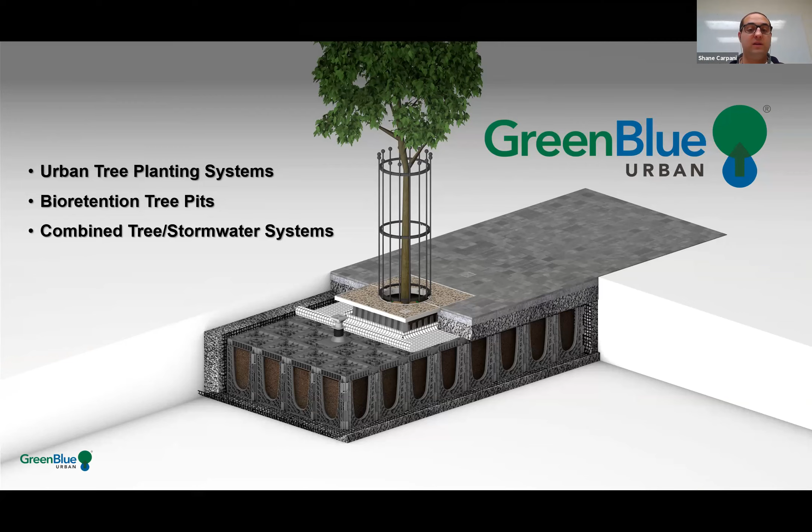Then once we realize that, we will move into the stormwater aspects of how we integrate stormwater management into those types of systems.

The benefits of urban trees are very often understood purely as an aesthetic or beautification benefit that trees provide any given area, whether it be a streetscape, a plaza area, or whatever the case may be. But there's a lot more than just beautification and aesthetics that trees provide. The second most important one, as we can see from this study done in Indiana, is stormwater management. 31% of the benefits provided by trees, these economic and environmental benefits, are being provided through what they can do for stormwater management and the sustainable management of stormwater.

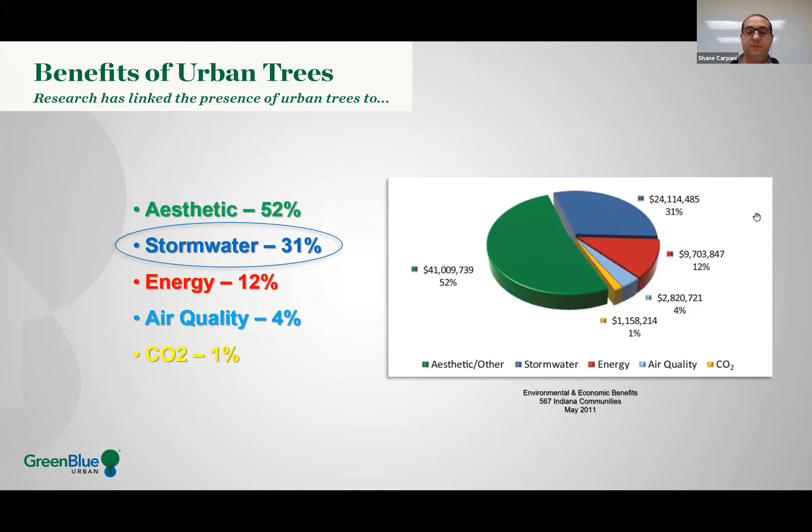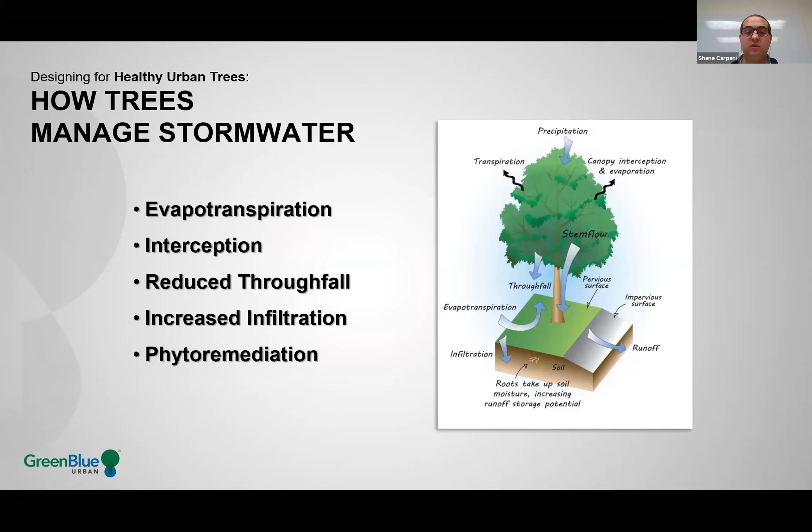We're going to talk about that today, everything from evapotranspiration to interception, the canopy interception of how the tree collects the stormwater, what it does with the stormwater, increased infiltration, phytoremediation, and different elements in which trees actually accomplish that kind of benefit.

First, we'll start with this statistic to help put it into perspective: for every 5% of canopy cover in an urban area, stormwater runoff is reduced by 2%. So every increase in 5% of canopy cover is a reduction of 2% in stormwater runoff. This is just factoring in the rainfall actually landing on the canopy or leaves of a tree - this isn't even taking into account runoff that we're actively channeling into a bioretention tree pit, which we will discuss momentarily.

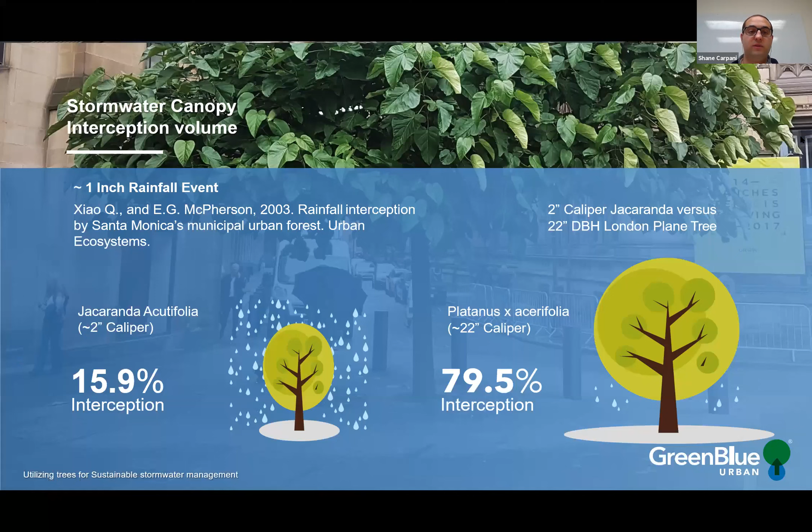With that canopy interception, of course, the larger and more mature the tree, the more stormwater it's going to be able to intercept, and the more stormwater it's going to be able to reduce through uptake via its root system as it takes that stormwater up through transpiration. We'll talk all about this in more detail.

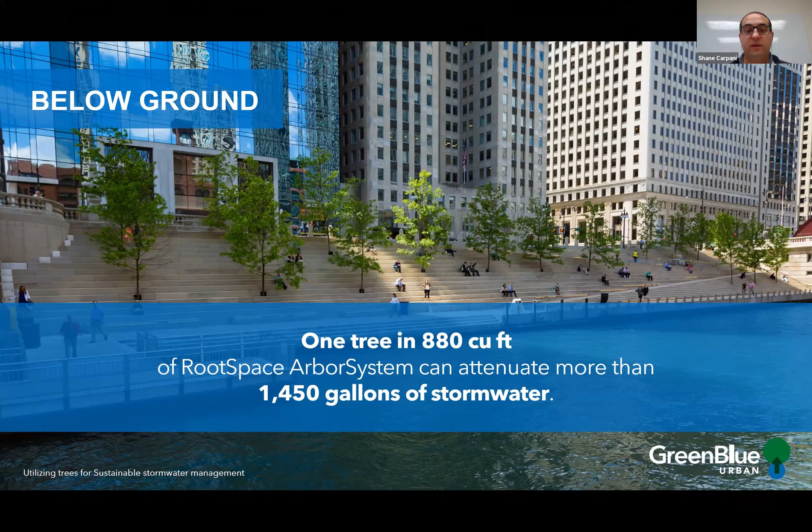Looking at some further numbers here, 880 cubic feet of an engineered bioretention tree pit system can attenuate over 1,400 gallons of stormwater. This puts into perspective how much stormwater these engineered tree pit systems can actually manage. We've worked on projects where, through the use of these kinds of systems and designs, we are managing 100-year storm events with no runoff from the site. So huge amounts can be accomplished through the use of this.

Now, why do trees fail? We talked about needing healthy trees to take advantage of those benefits. Well, why is it that most trees in urban areas are not healthy? There's a few factors that come into play in relation to that.

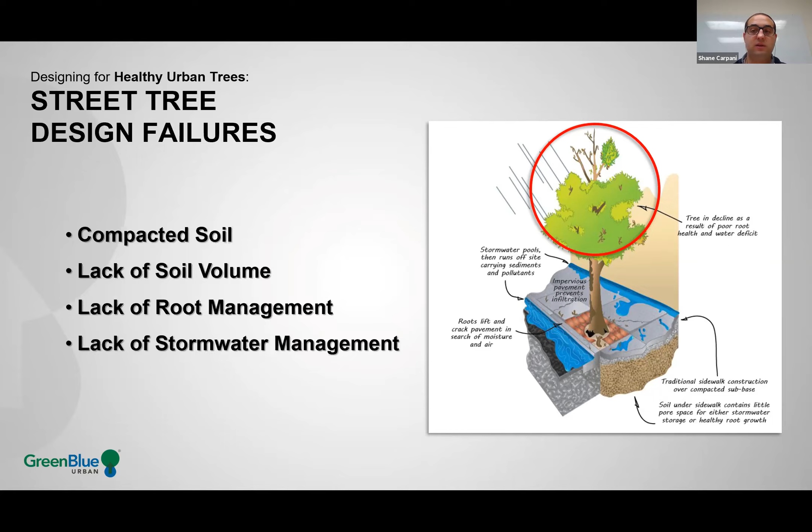The first of which is compacted soil. Not having an adequate volume of uncompacted soil is probably the number one cause of premature mortality in urban trees. So there's no rooting volume for the trees - there's not enough space for the tree roots to establish below ground without damaging surrounding infrastructure. And we're not managing the tree roots into intended rooting areas so that they're not damaging utilities, paved surfaces, building foundations, or other built infrastructure that might be around.

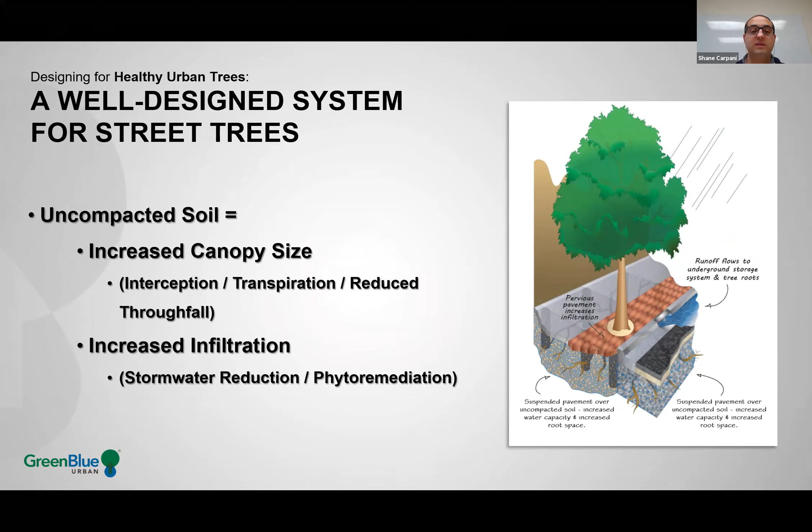So we increase the amount of uncompacted soil, and we're increasing both the rooting volume for the tree and therefore the mature rate and canopy diameter and size of that tree, as well as the infiltration and the attenuation area that we have to hold stormwater. So the more roots and the more canopy, the more stormwater these trees will be able to manage.

So imagine how to accomplish that in an urban area. Think of these trees lining a streetscape or dotting a pedestrian plaza area. How do we provide for this kind of rooting environment underneath that hardscaped area? That's a lot easier said than done in an urban environment where we've got utilities and building infrastructure competing for that space. So that's really where the root space arbor system comes into play, an engineered system that allows for the marrying of the tree with the built environment.

So bringing the best of both worlds and allowing that tree to coexist in an urban environment, thrive, and reach maturity, while ensuring that there's not going to be any built infrastructure damage as a result of the tree maturing. So how can we better utilize trees for stormwater management?

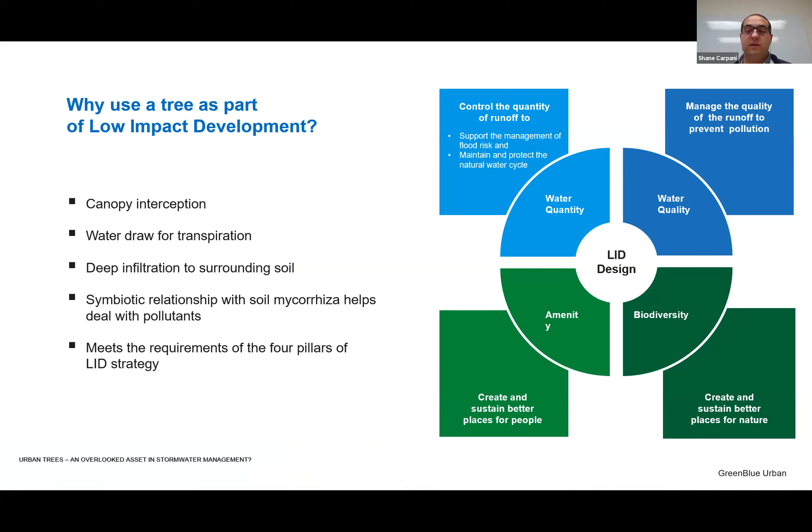First, we're going to talk about planning, and then the different design considerations we have to consider when designing trees. We're going to talk about the way trees manage stormwater in terms of quantity, so reduction of stormwater quantity, and then improvement of the quality of the stormwater that there is. And then, of course, there's other amenity and biodiversity benefits that trees provide as well.

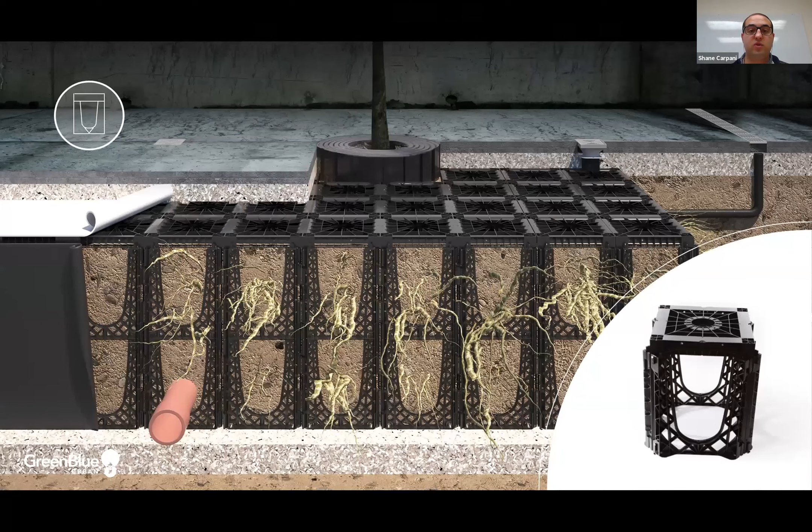So these are the components we're going to take a look at. These are the considerations we need to make when designing trees into an urban landscape. If we tick off all of these elements, we are assured to have a tree that reaches maturity in an urban environment. Number one, as I mentioned already, is uncompacted soil.

If we don't have enough uncompacted soil volume for the trees, they're simply not going to reach maturity. The most cost-effective way of achieving uncompacted soil underneath a hardscaped surface is through the use of a pavement support system or soil cell, like we're seeing on the screen here, the root space system.

This is a structurally engineered system manufactured from 100% recycled plastic. It's H20 rated, so it can be under fire lanes and roadways, not just pedestrian areas. This system assembles to provide 97% uncompacted soil, or 97% void space. So we fill this system with healthy uncompacted soil. The system itself holds up the surface, and then it's full of healthy uncompacted soil that can be used for tree root growth and/or stormwater attenuation.

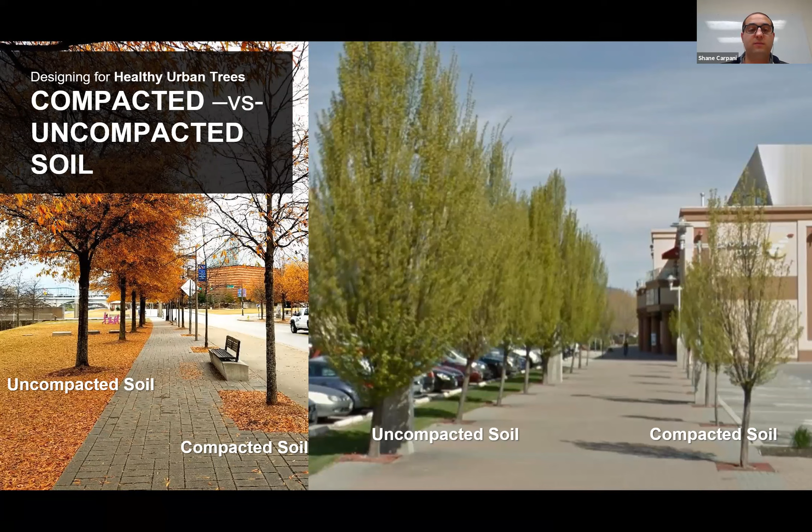Here we can take a look at some in situ case studies of uncompacted soil volume versus compacted soil. The trees on the left in both of these photos are planted in uncompacted soil versus the compacted soil of the trees on the right. We can see how much better the trees in uncompacted soil are faring.

The amount of soil any given tree requires in order to reach maturity depends on a couple of things, primarily the species of the tree and the canopy diameter of that tree at maturity. It can range anywhere from 300 cubic feet to over 1,000 cubic feet per tree in order for that tree to reach what we would call its species potential.

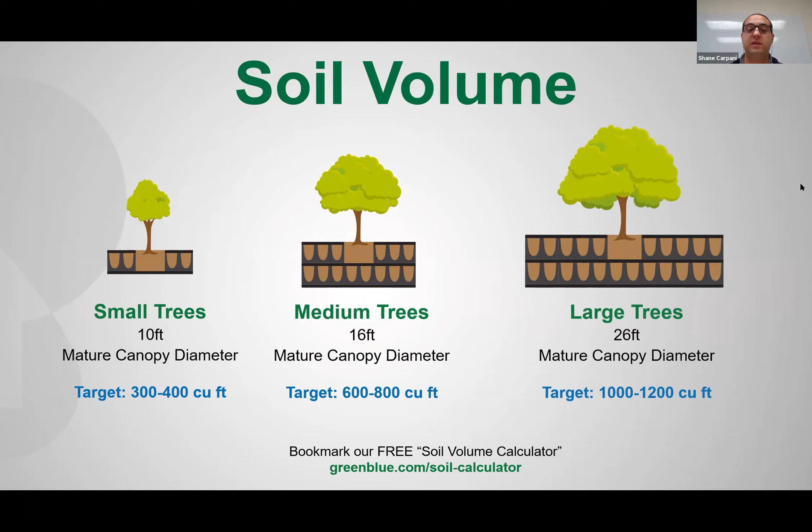Bearing in mind these numbers are for individual tree pits, the most cost-effective way to achieve high volumes of soil for trees is when we link tree pits together, or connect them in a linear connected fashion. We'll talk about that a little bit further on.

The thing to understand is that not all soil volumes are created equal. There are several different urban soil planting or urban tree planting options out there. Before the advent of soil cells, the most popular one was structural soil. We can see here, GreenBlue Urban invented the world's first soil cell in the late 1990s. You can see a controlled monitored study here at Bartlett Tree Labs in Charlotte, showing the use of all of these different systems.

And you can see after just 1 year, the growth rate provided by the soil cells and how much higher those growth rates are in the trees in soil cells. And of course, that's because structural soil is a combination of 80% gravel and 20% soil.

80% gravel and 20% soil. The 80% compacted gravel is what provides your structural stability to hold up the surface. And then it's got 20% soil mixed throughout that gravel that provides growing medium.

Whereas the soil cells, like I talked about before, we're using only 3% of that excavated area to hold up the surface with that root space system, and 97% of that area is usable soil. Here, this is after the study concluded at 3 years. You can actually see they air spaded out the soil to expose the tree roots, and you can see how much more root colonization there was from the tree in the soil cells, as you can see here.

So as I mentioned here, structural soil is 80% gravel. So these large gravel here, you can see representing that. And then the 20% soil that's mixed throughout the voids of that gravel.

This is showing the comparison. So the blue outline that you're seeing here and the red outline is the exact same soil volume. The blue outline is the structural soil layout, providing 120 cubic feet of soil. And that red area here is the soil cells, providing that same amount of soil, but with less excavation, less labor, smaller area, and providing that same soil volume.

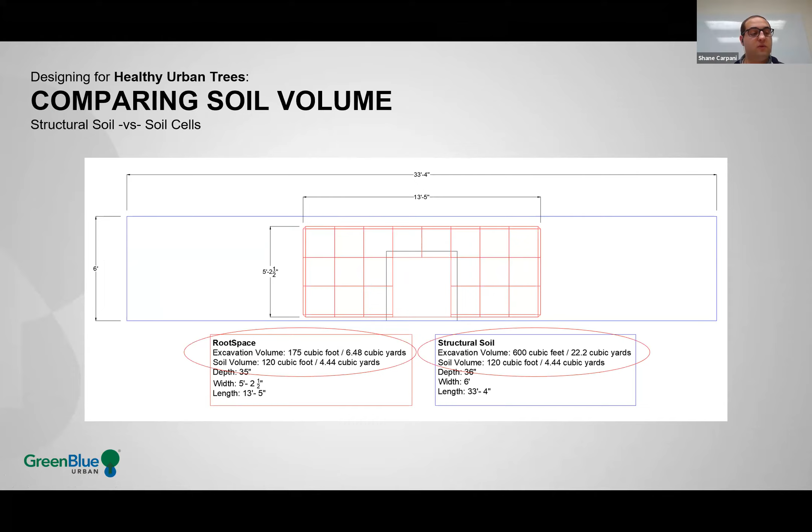So as mentioned, the system is manufactured from 100% recycled plastic. You can see the system in use here underneath the vehicular parking area.

Here we can see a bird's eye view of the installation of the system. Very modular and versatile system, able to be configured in any kind of shape and size. We can see this is actually a pedestrian plaza area that's separating a parking lot from a shopping mall area.

You can see the openings here where the tree root balls are going to go. So they're assembling this system out, leaving openings where the trees are going to go. This whole thing will be filled with soil. A surface will be put on and the trees will be planted in the opening.

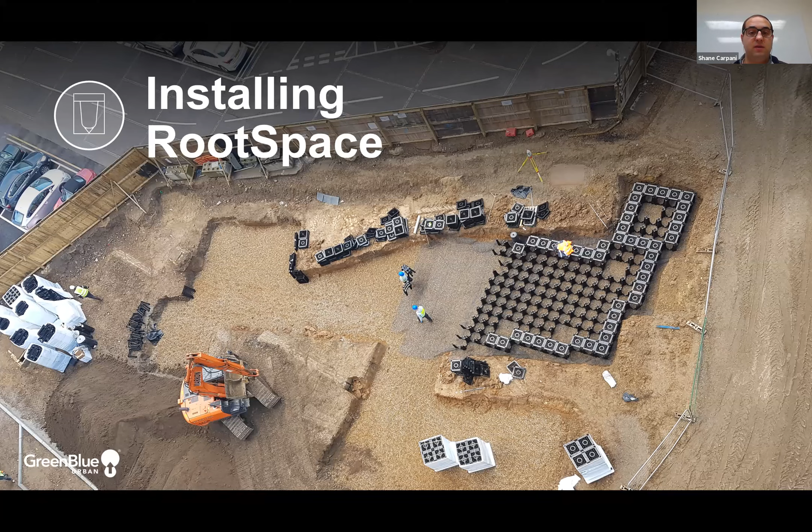This particular one has a permeable paver surface above it, allowing for percolation through that permeable paver surface into the system to allow for attenuation within the soil volume and tree uptake through the root system as the tree takes that stormwater up through transpiration.

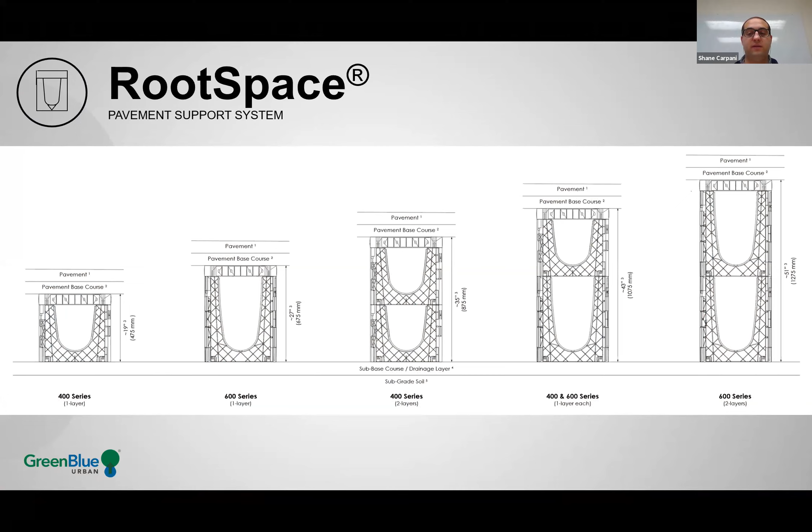Here we can see some of the common depth profiles ranging from 19 inches to just over 4 feet in depth, depending on different situations and scenarios. It's very easy to work utilities into the system, whether they be new utilities or existing utilities.

Here we can see the system being filled with soil, very easy to fill with soil. And one of the important things to understand again with this system is that this is being filled with healthy, uncompacted soil. There are no structural blends or proprietary elements. Any good planting soil can be used inside this system.

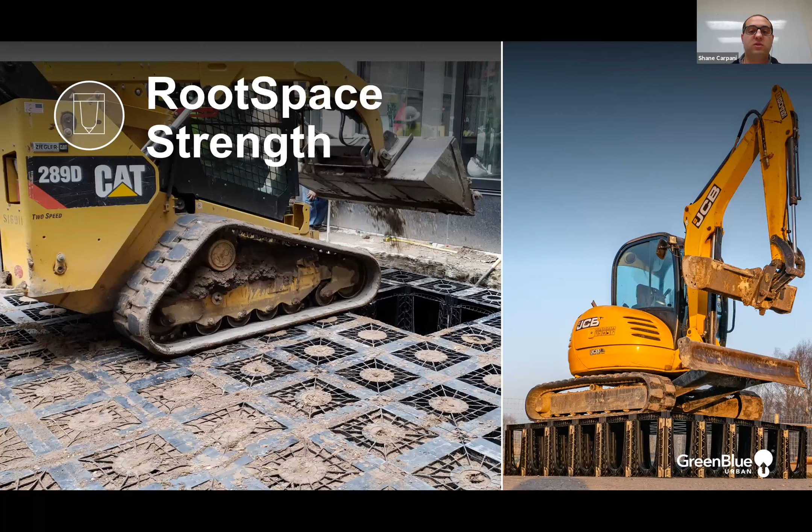And as I mentioned already, it is H20 rated. So the system goes under roadways, maximum vehicular areas with minimal surface above it. And you can see here even the ease and ability of construction equipment to drive right over top of the system without even a surface above it.

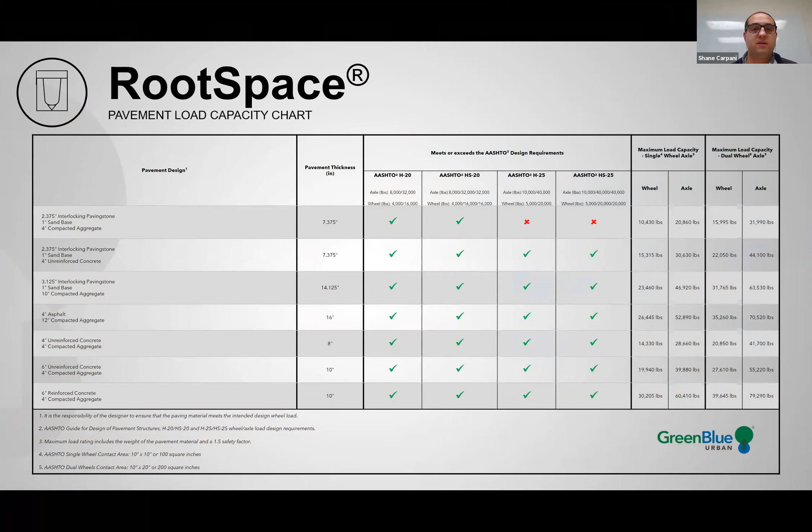So here we can see that with as little as 8 inches of surface, the system is H20 rated for maximum vehicular traffic.

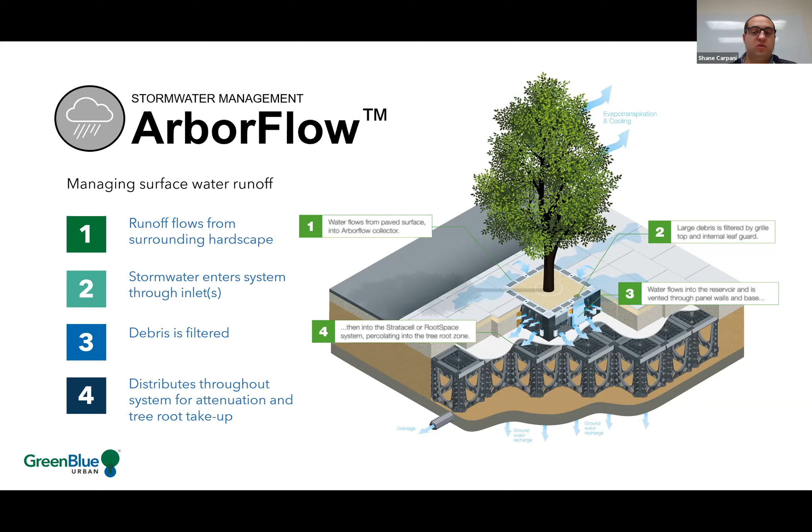So we'll take a look at stormwater now that we've talked about some of the elements that we need to be thinking about in order to have that healthy tree. We'll take a look at the stormwater side of things here because we want to take that stormwater, channel it into this engineered tree pit system to use that soil to attenuate the stormwater and allow the tree to take up that stormwater. So this short animation here is going to show the basic function of the system.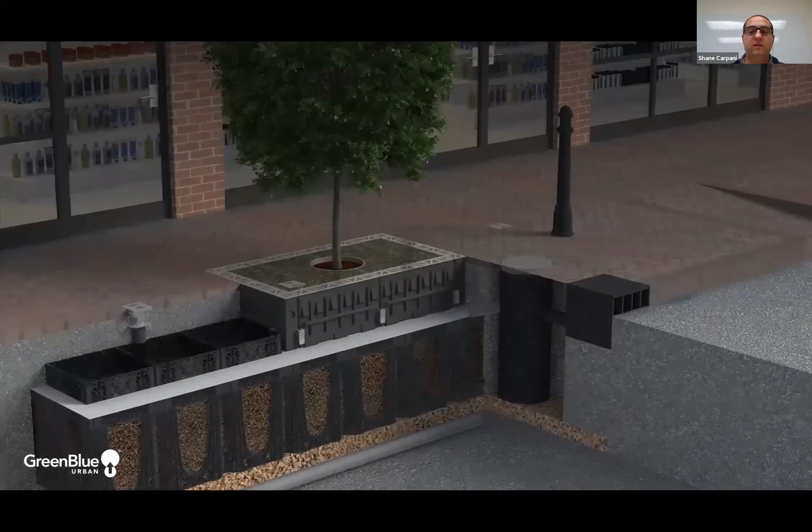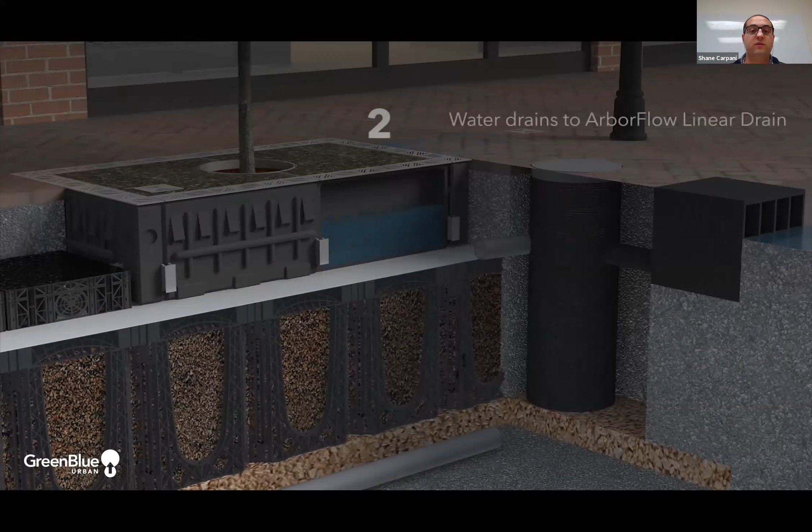In a rainfall event here, we'll see the different ways in which we can bring stormwater into the system, whether it be through a curb inlet, into the system through a catch basin or sediment separator, and distributed throughout the system. It could be through a linear drain or a trench drain, as we're seeing around the tree there. That linear drain could also be along the back of a curb of some sort. It could be through the ArborVent inlet, as we're seeing there.

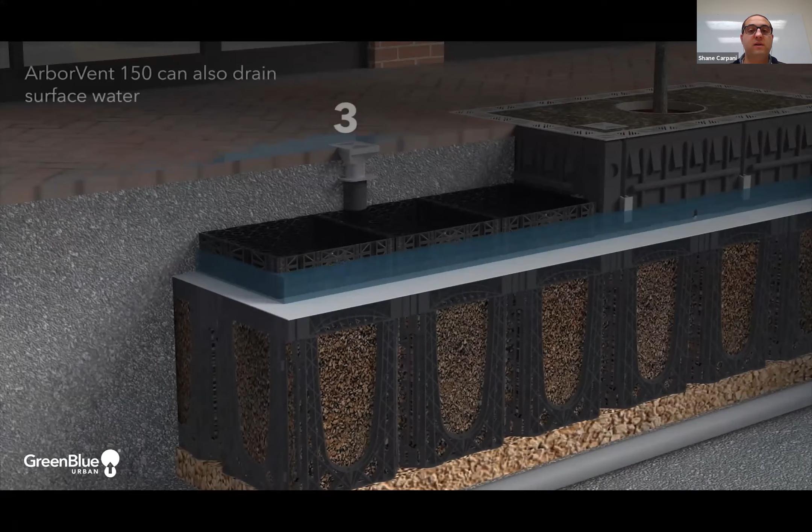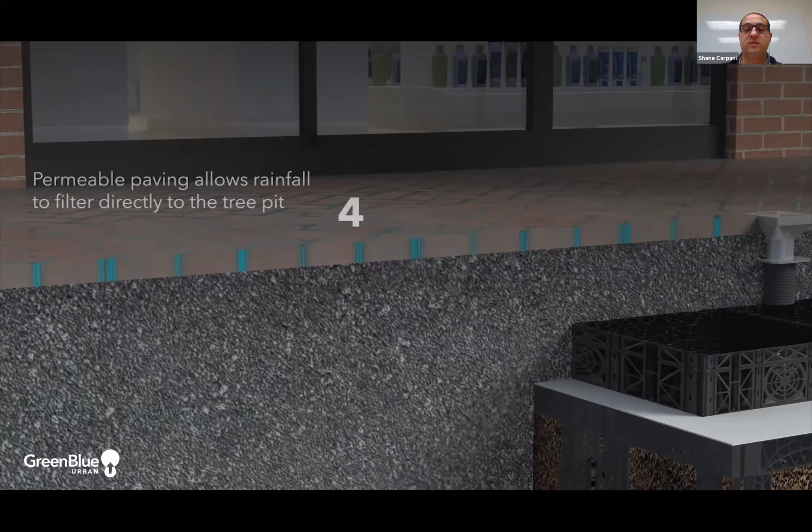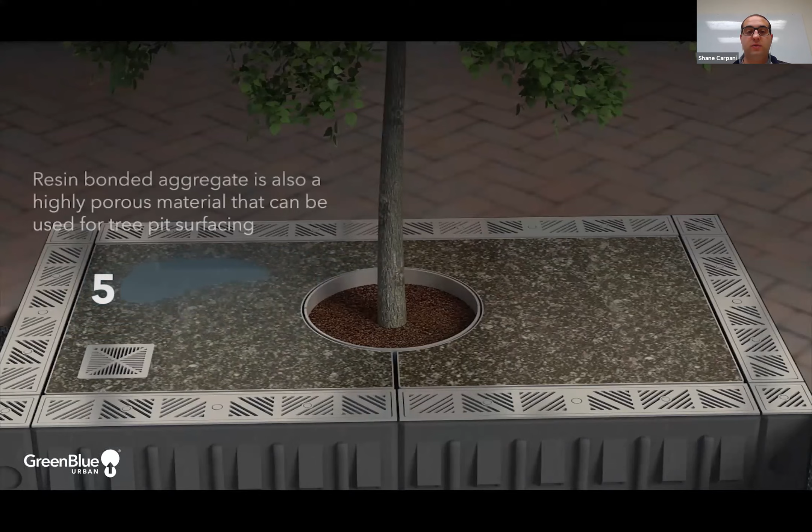Or it could be through a permeable paver surface, as we're seeing right here, allowing water to percolate down into the system, as in the previous installation example. Or it could be through another version of pervious surfacing like arbor, a resin bonded aggregate, or decomposed granite.

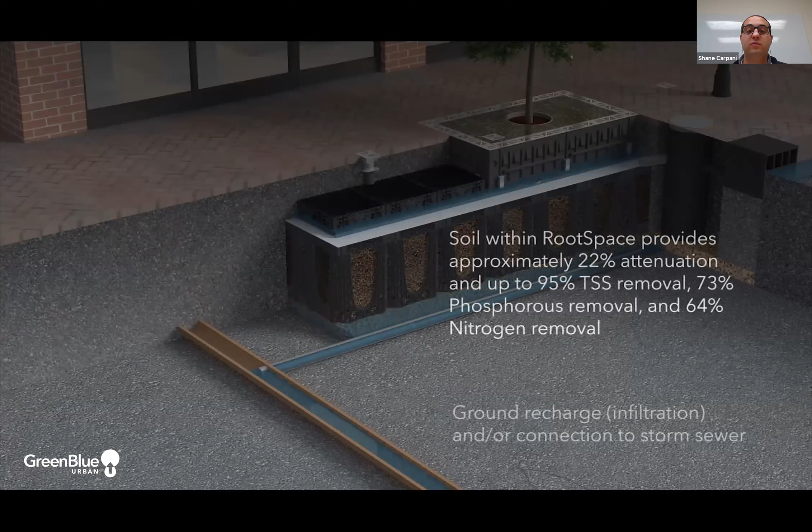Regardless of the way in which stormwater enters the system, it's evenly distributed throughout the soil profile for attenuation and root take-up, and any excess is drained out through a drainage layer below, tied into the storm system, and infiltrated into surrounding groundwater depending on site conditions. The discharged stormwater is significantly cleaner than when it entered, because the system uses the soil and the tree to filter out nitrogens, phosphorus, and other materials.

This chart shows that quality improvement of the system, looking at total suspended solid removal, total phosphorus removal, and total nitrogen removal. This is a comparison of the bioretention tree planting system to a rain garden, a more traditional green infrastructure application. The top dark green line is the target removal rate, the middle green line is the rate achieved with the rain garden, and the bottom light green line is the rate achieved with the bioretention tree pit.

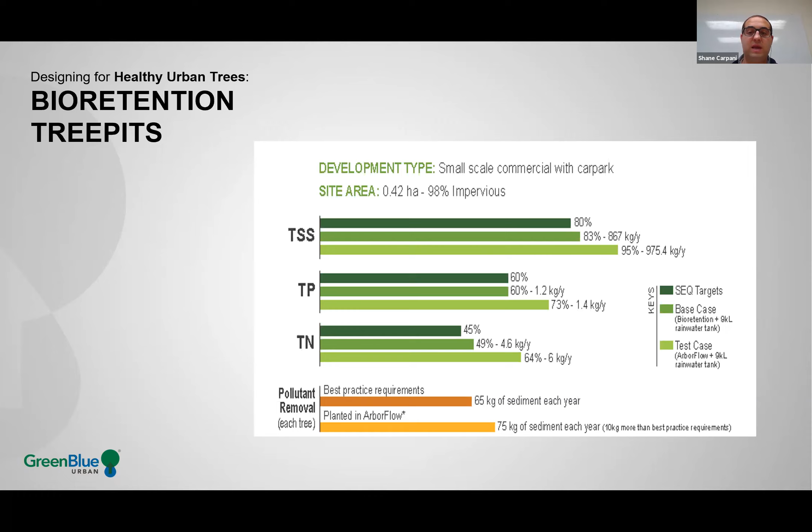You can see that in every instance, the bioretention tree pit actually outperformed the rain garden, all with the added benefit of reduced maintenance. Because a tree doesn't have the same level of maintenance involved as a rain garden or bioswale, we can bring the ongoing costs of the BMP to a much more manageable standpoint.

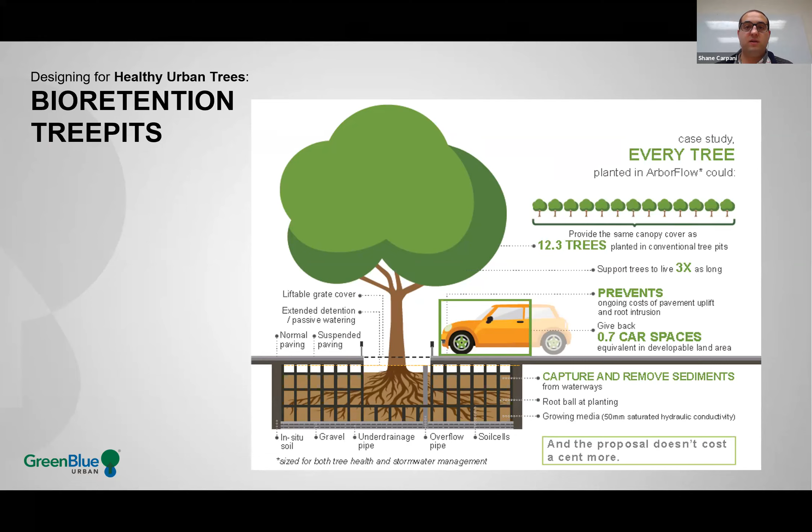In addition to reduced maintenance, we also have maximization of real estate. Because the system is all below a hardscape surface other than the tree pit or tree planting opening itself, we can maximize surface for parking, sidewalk, or whatever the case may be, versus the otherwise underutilized real estate of a rain garden or bioswale application.

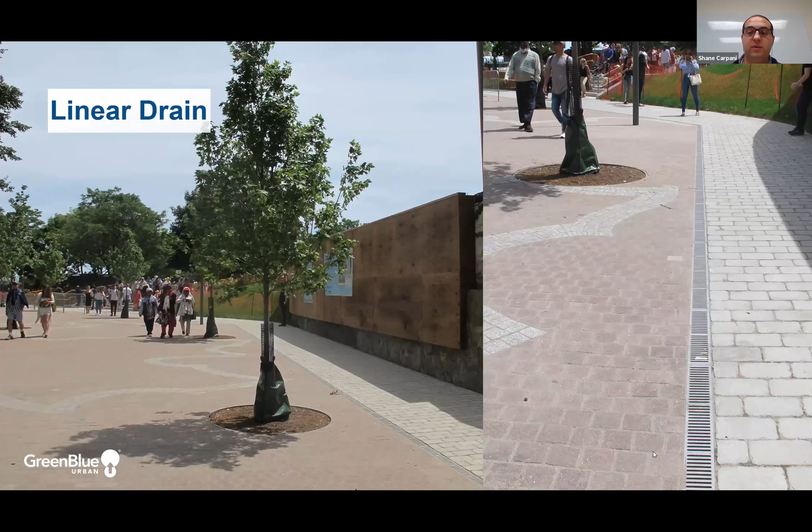Here we can see that linear drain a little closer up. This is a common application, whether on the back of a curb, along a parking lot area, or adjacent to a pedestrian plaza area like we're seeing here. We can bring that stormwater in and distribute it throughout the soil profile.

This particular linear drain has a shutoff so that the system can be shut off during the winter months, so that we don't get de-icing salts into the tree pit area. During winter, stormwater bypasses the bioretention tree pit and goes straight into the storm sewer. During spring, summer, and fall, when de-icing salts aren't being used, all of the stormwater enters the tree pit system.

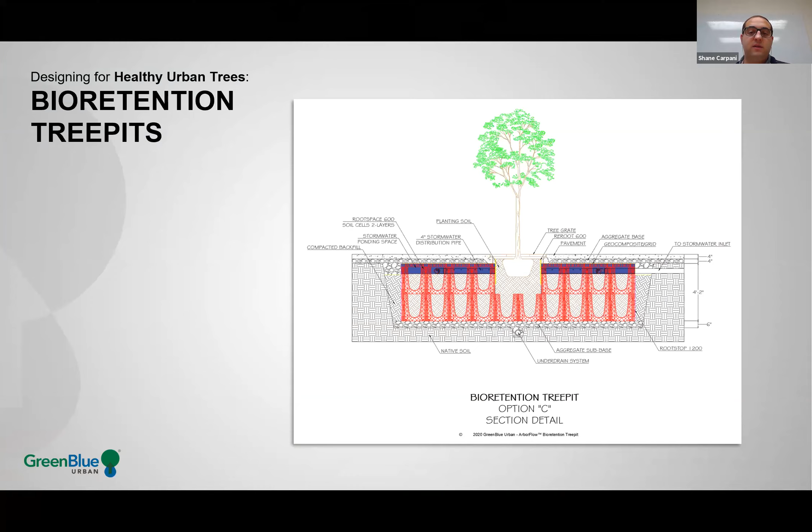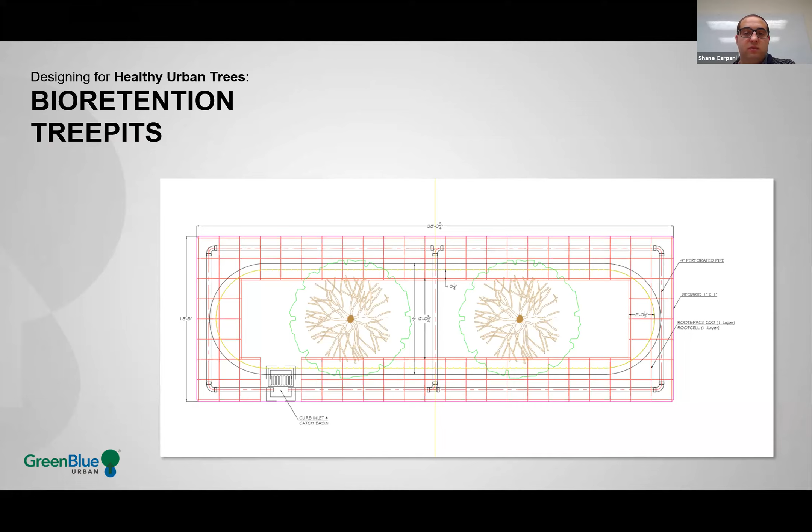Looking at a few details here, we can see a high capacity bioretention application and a standard cross section showing one of those applications. Here we can see a road median with a catch basin in a plan view showing stormwater entering through this catch basin in the roadway and distributing throughout the distribution piping network that we can see.

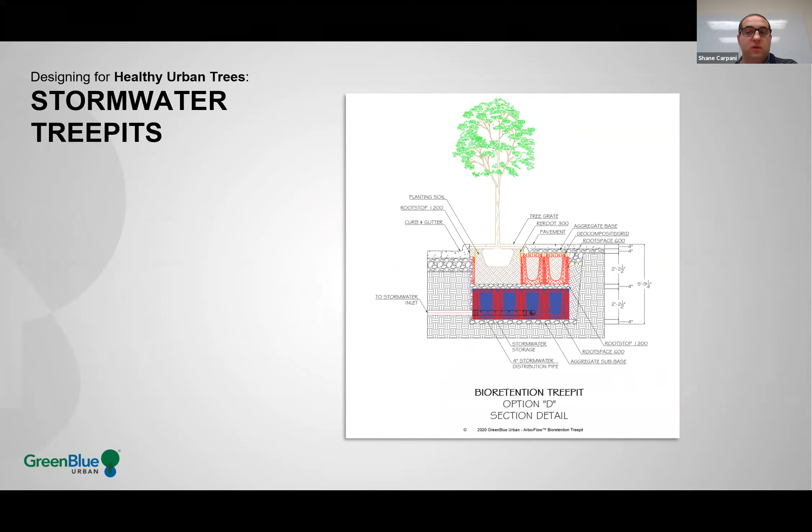Sometimes we might have a layer below that we're using for stormwater storage, and then a layer above that's full of soil for growing medium for the trees. There are lots of different ways we can design these systems depending on the goals of the project and the nature of the project.

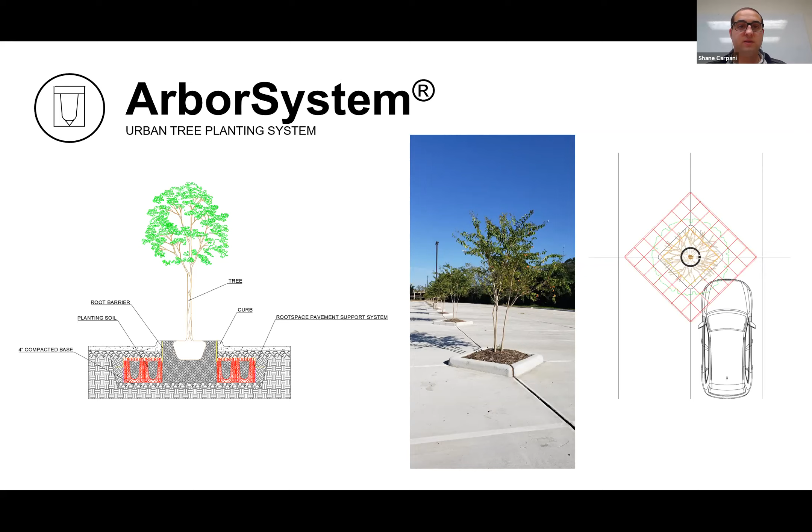Here we can see a parking lot application where, through the orientation of the tree pit opening—what we call a diamond tree pit opening—we can maximize the use of the system without losing any parking stalls. We can still maximize the full use of parking and real estate while getting the benefits of the system. So from a development perspective, this shows how we're still getting our bang for buck from a real estate standpoint while meeting these requirements.

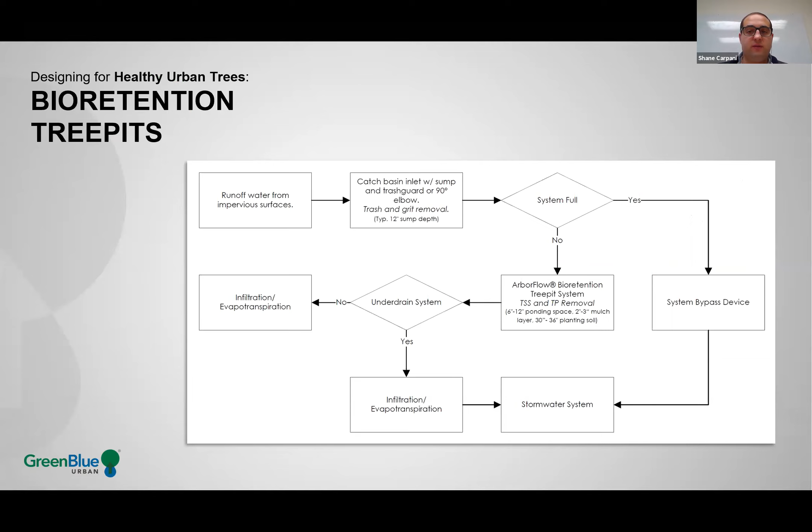Here we can see the chart showing the flow, depending on whether there's a bypass or not, of what happens specifically with that stormwater.

These modules can also be used for stormwater storage. When we're not planting a tree in them, they can be left void of soil and wrapped in a membrane—either permeable for infiltration or impermeable for storage or detention. You can use the system as an alternate to a more traditional dry well or detention system. The benefit here is that because of the strength of the system, it can be very close to the surface, and because of the 97% void space, we're maximizing usable area and reducing excavation requirements.

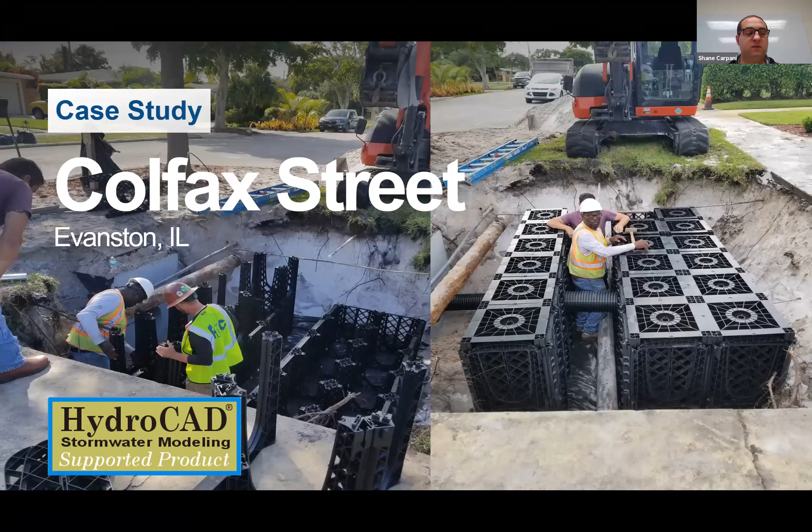Here we can see the system going into the ground in Evanston as a more cost-effective alternate to a gravel dry well.

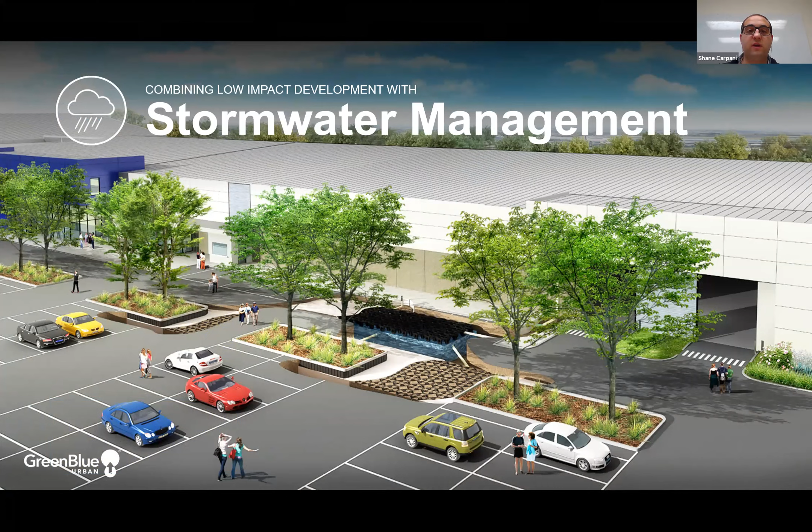You can also use the systems in conjunction with each other. This Costco building utilized a low impact development project in this manner, using two functions of the system together. They take the rooftop runoff from the Costco building and bring it into the modules, empty and wrapped in an impermeable membrane to store the stormwater, then use that stormwater to irrigate the tree plantings along the parking lot—a very innovative green infrastructure application here at this Costco.

Looking at how we bring stormwater into the system, it could be through a permeable surface—permeable pavers, or permeable concrete or asphalt type material.

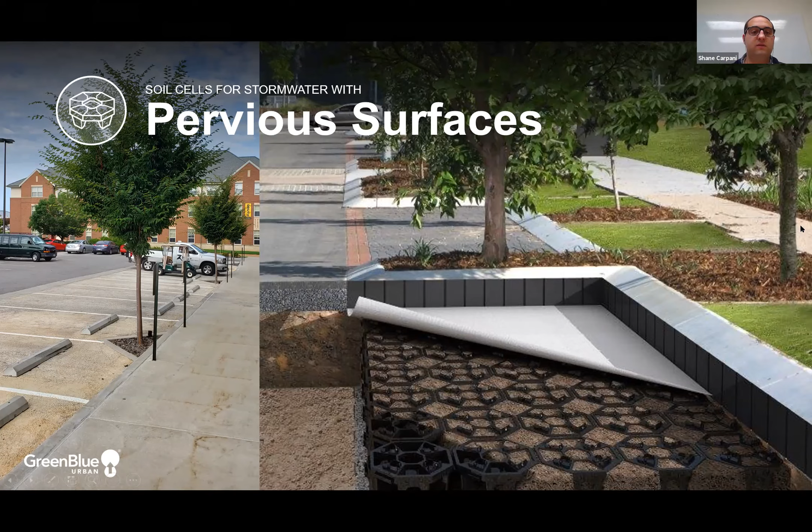This rendering on the right and photo on the left is at the University of Missouri campus, the Mizzou campus in Columbia, Missouri. This is a linear parking lot going along the Dobbs Pavilion at Mizzou, with permeable paver parking along it and the system underneath. They take all the runoff from the parking lot and channel it into the permeable paver parking stalls, allowing it to percolate down into the system for attenuation and tree root take-up.

It could also be another kind of permeable surface, like a resin bonded aggregate or a decomposed granite of some sort.

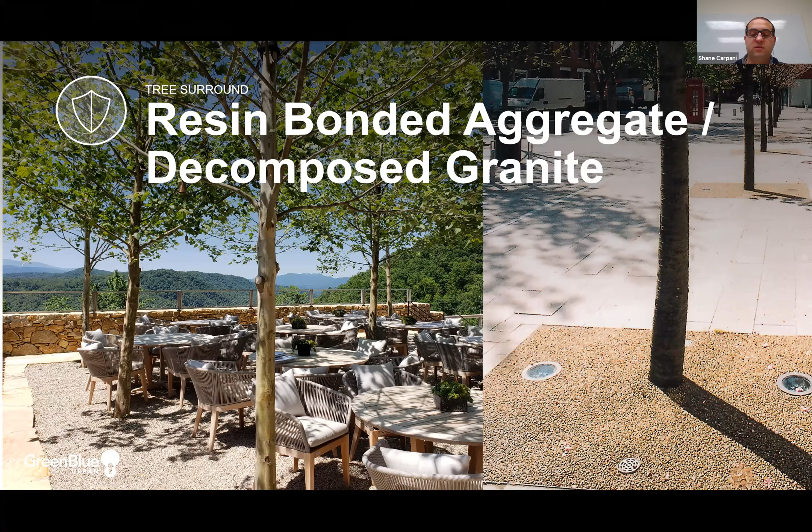I apologize for the banging going on here at the office—I seem to not have gotten the memo about the furnace being replaced today, so I apologize for that.

We've already talked about the linear drain. Here we can see an application lining the back of a curb, taking the sidewalk runoff and bringing it into the soil cell system below.

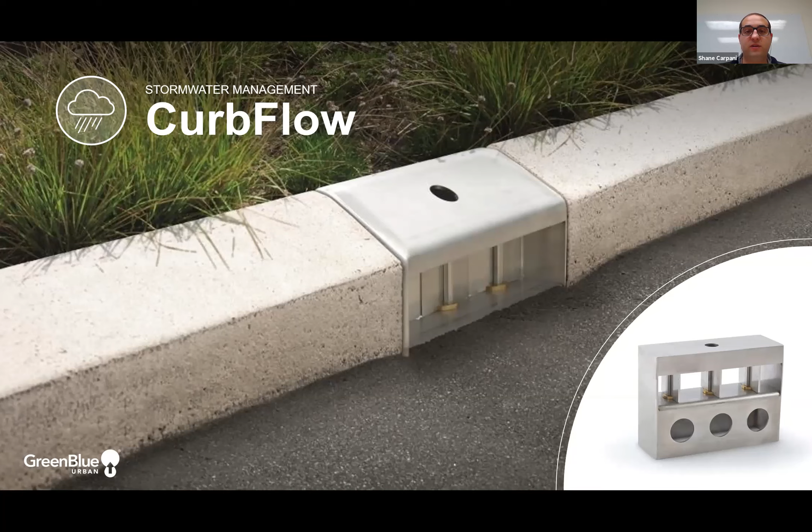A curb inlet, like we're seeing here, brings runoff in off a roadway. This particular curb inlet is called a CurbFlow, and it has a closable valve on it—we can see in the background photo how it's actually closed. This allows for shut off of the system during the winter months, so that de-icing salts don't enter the bioretention tree pit system.

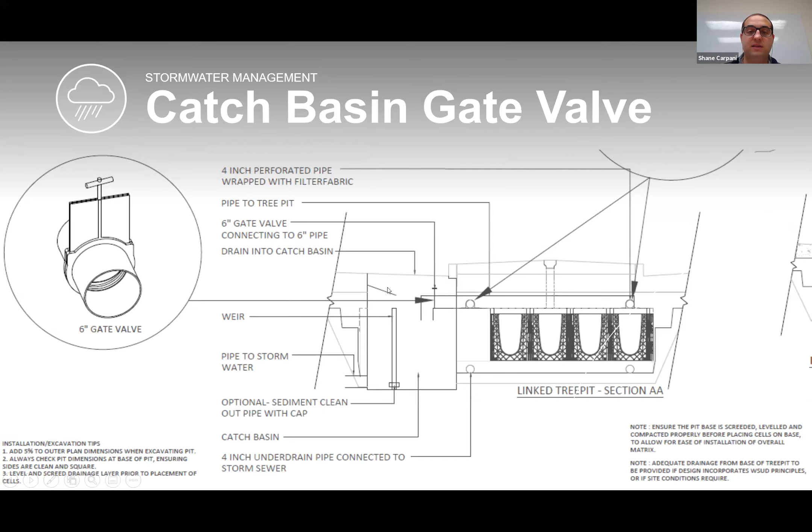Or it could be integrated inside the catch basin through a gate valve application like we're seeing here. This allows the use of a single catch basin with a simple gate valve shutoff, so the system can be shut off during winter months while stormwater bypasses into the storm sewer. During spring, summer and fall, the gate valve is open, allowing stormwater to enter the tree planting system, and only in a very heavy rainfall event, when the system is at capacity, does it overflow into the storm sewer.

We could also look for bioretention or pre-treatment purposes, rather, when we don't want to unnecessarily have to shut the system off during the winter months. We could look at another type of pre-treatment to remove those de-icing salts and heavy hydrocarbons prior to their entering the bioretention tree pit system.

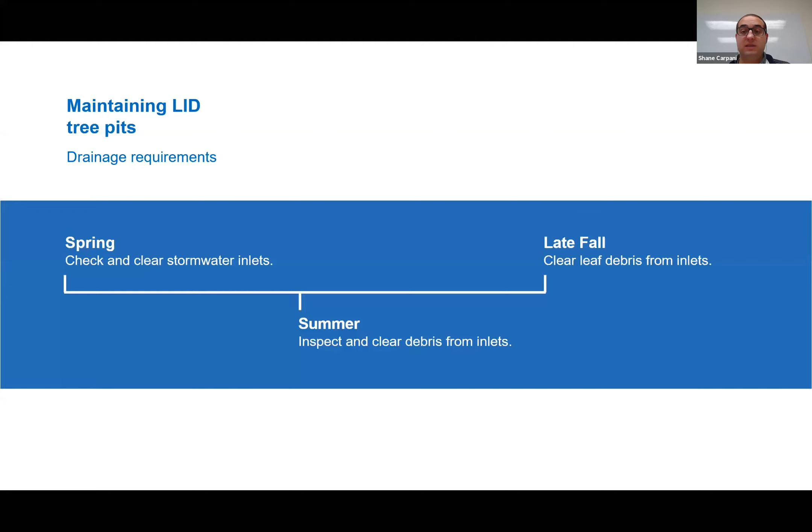Taking a look at maintenance of this system, as I mentioned already, the system is very low in maintenance. There's a couple things in relation to the tree that need to happen, or checking the inlets for the stormwater, ensuring that the inlets stay clean and clear, whether it be a catch basin, curb inlet, a linear drain, or the permeable surface itself. We need to make sure that inlet stays clean, because if it gets clogged, the system will cease to function. Then there are some tree related things, like debris and pruning, structural pruning of the tree as necessary. That is quite literally all the maintenance involved in this system.

So a very low maintenance way of taking a look at some of these bioretention, low impact development applications. We'll take a look at some case studies now and try to put things into perspective.

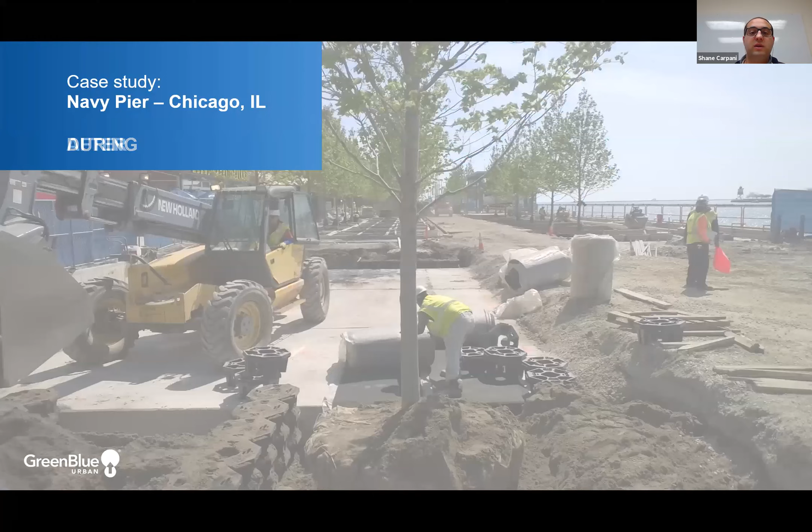The Navy Pier uses our system. You can see this is before, this is during the installation, and this is just after the installation. These trees throughout the pier area are using the system. This is shortly after installation was completed, and these are the trees 2 years later. The trees are doing very well, even in this completely hardscaped urbanized environment. These trees are thriving as though they're in a forest-like setting through the provision of the system. So we can have trees that are thriving even in the harshest urban settings when we design for them accordingly.

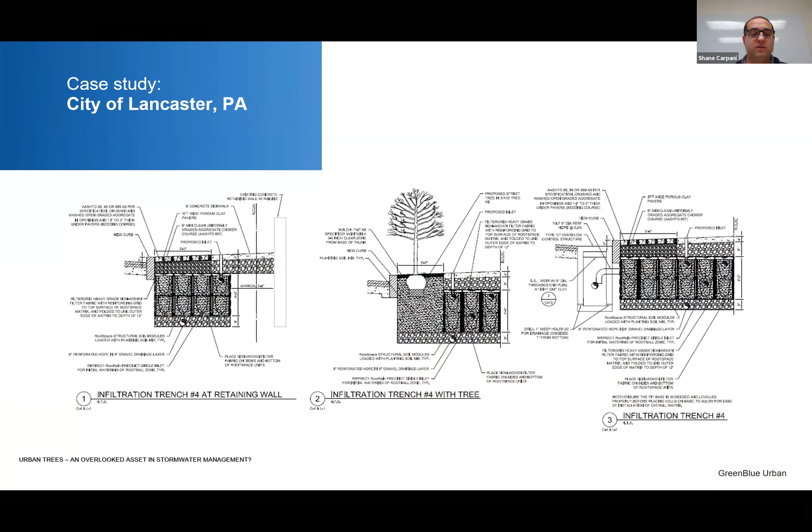Lancaster, Pennsylvania, we can see a cross section here pulled from the City of Lancaster standard details. Lancaster is very progressive in their green infrastructure goals. They have implemented huge amounts of green infrastructure throughout the city, to the point where they are now seeing a significant reduction in gray infrastructure capital costs as a result of the benefit and cost savings they are achieving through the use of green infrastructure throughout the city. These bioretention tree pit systems play a large role in that.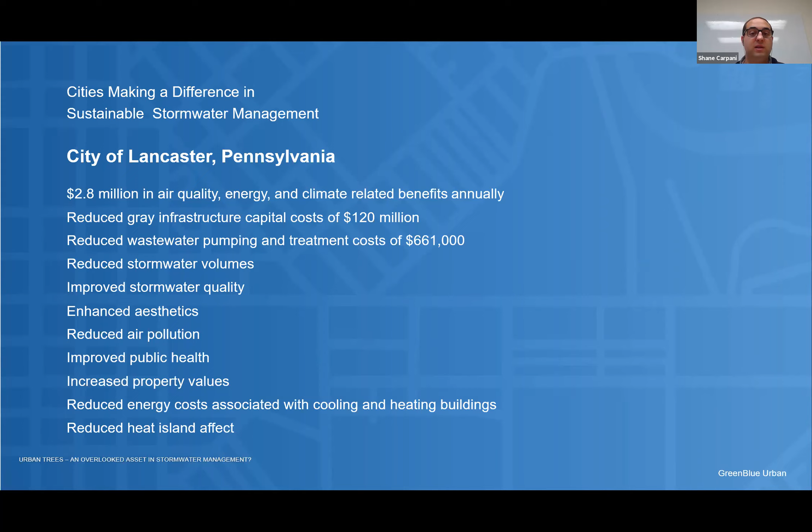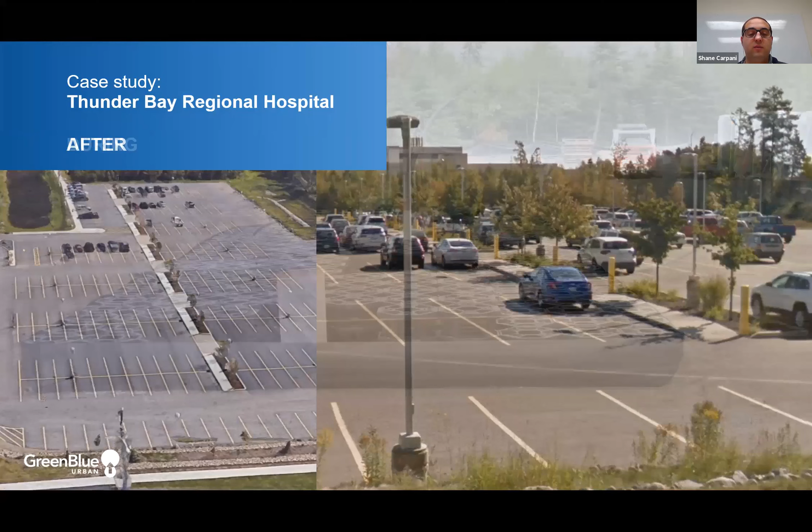Thunder Bay Hospital up in Ontario, Canada. This was a hospital we worked on that had a large storm pond on site, and they were short on parking, so they wanted to use that storm pond area for a parking lot. They used our system underneath the parking lot, turning what was largely a stormwater pond area into a parking lot, while still meeting the stormwater requirements through the use of the system below it. This is what we call one of those hybrid systems, where some of the modules are full of soil to provide growing medium for the trees, and some of the modules are empty for stormwater storage.

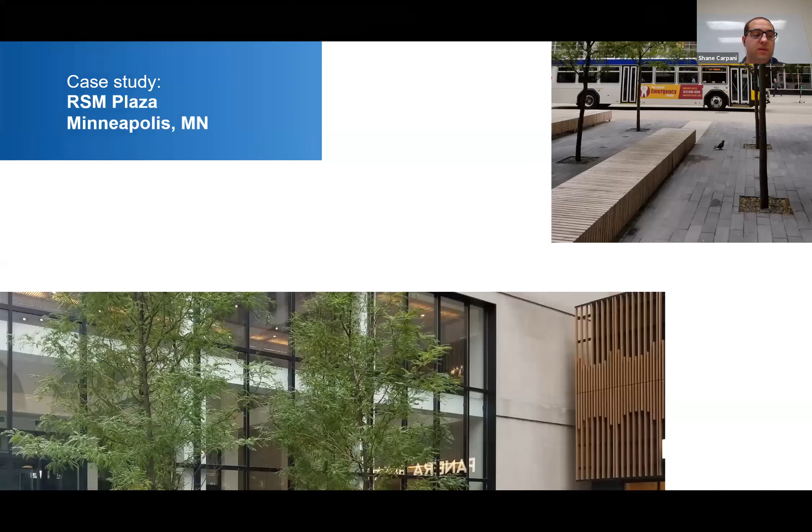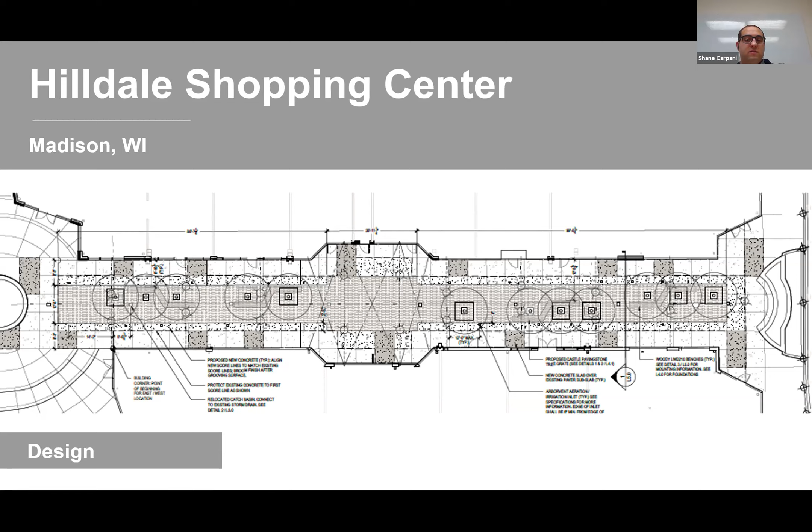These trees are doing extremely well as a result of the system. So taking a look at the cost benefit analysis on some of these, to get into the dollars and cents: Madison, Hilldale Shopping Center in Madison. We'll take a look at here. This is the design, a shopping mall, an outdoor shopping mall. You can see a plan view here of the various trees planted here. This is the design. They're bringing stormwater in, distributing it throughout distribution pipes throughout the system.

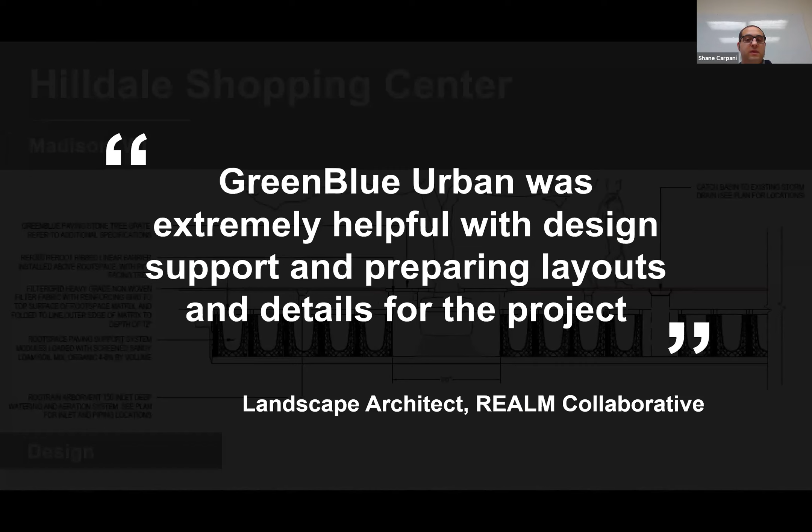Taking a look at the cost of this, it was planted in 2019, just last year, at an installed cost of just over $9,000 per tree. And it's achieving 610 cubic feet of soil volume, or rooting volume, for those trees. So at a cost of just over $9,000 per tree, that's all material, installation, everything inclusive. These are providing an environment in which these trees are going to thrive long term and provide all the aesthetic benefit, in addition to the shade provision and all the other benefits that this shopping mall wanted, in addition of course to this management of stormwater on top of all those other benefits.

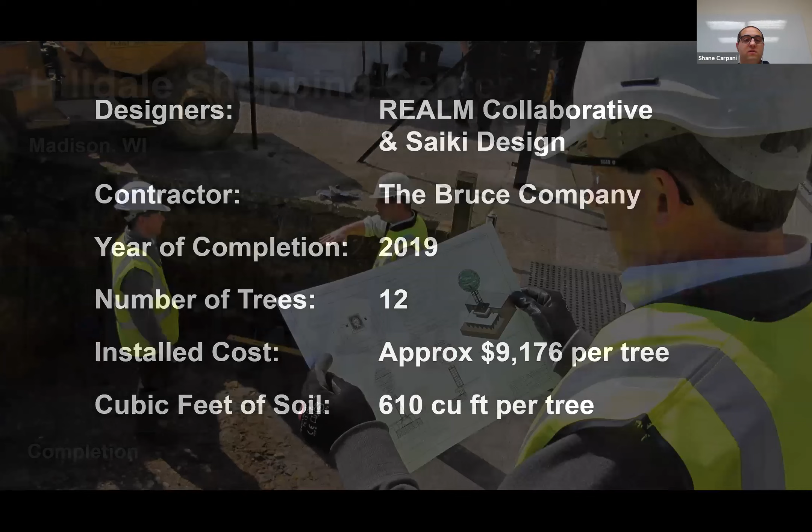Site review and installation support, of course, as a consultant in these kinds of green infrastructure bioretention applications, GreenBlue Urban support with the design and implementation of these kinds of systems, really from start to finish, providing various different resources, details and designs, and cost estimations as well.